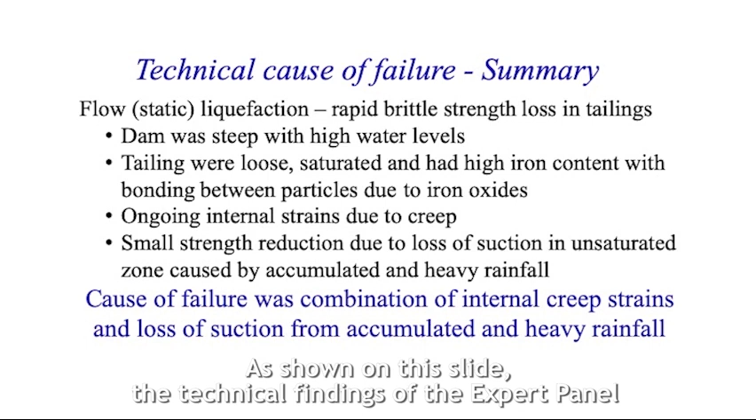As shown on this slide, the technical findings of the expert panel can be summarized as follows. The dam failed when the tailings experienced a sudden and rapid strength loss known as flow or static liquefaction.

The dam was essentially too steep and too wet, and the material in the dam was loose, saturated, and very heavy and brittle.

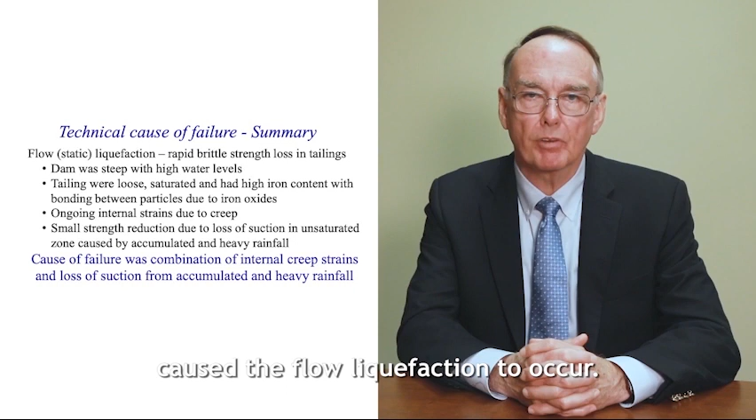The failure of the dam was due to internal creep strains that, when combined with a small reduction in strength in areas of the dam due to infiltration from accumulated heavy rainfall, caused the flow liquefaction to occur. Now let me explain what all that means.

Our assessment of the technical causes should start with an understanding of what this dam was. Most people think of dams as earthen or concrete structures designed to retain water in reservoirs.

In water retention dams, the structure must not allow water to pass through. It must be watertight, or as we say, impermeable to retain the water. That's not the kind of dam we're talking about here.

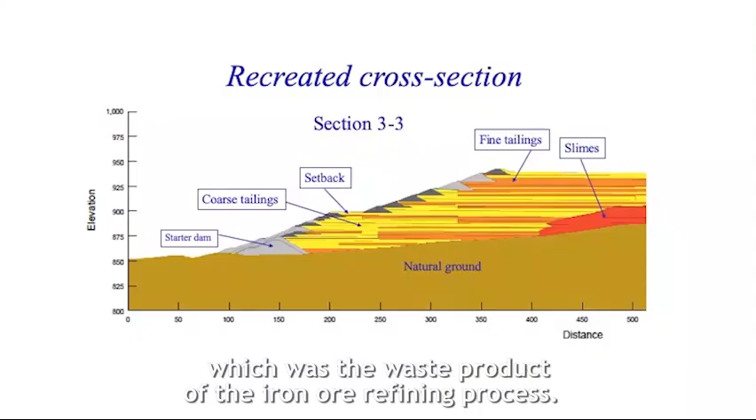This was a tailings dam. It was designed to create a retention area to store mine tailings, which was the waste product of the iron ore refining process. In fact, most of the dam itself was made of tailings.

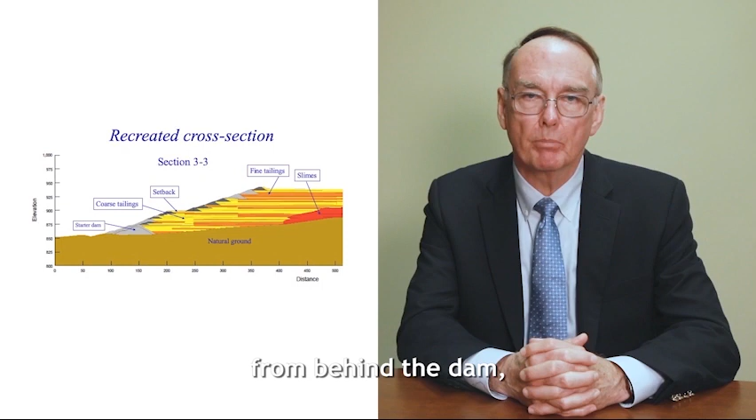A tailings dam like this one should be designed and constructed to be sufficiently permeable to allow drainage of water out from behind the dam, particularly because the stored tailings contain a lot of water that must be allowed to drain.

Or in other words, allowed to slowly flow or migrate out from behind the dam.

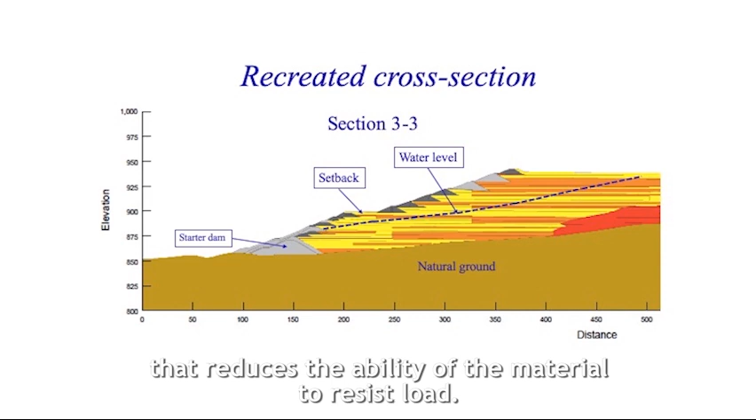This slide shows a cross-section of the dam showing the high water level in the dam. The absence of proper drainage creates a higher water level in the dam that reduces the ability of the material to resist load. This can undermine the stability of the dam.

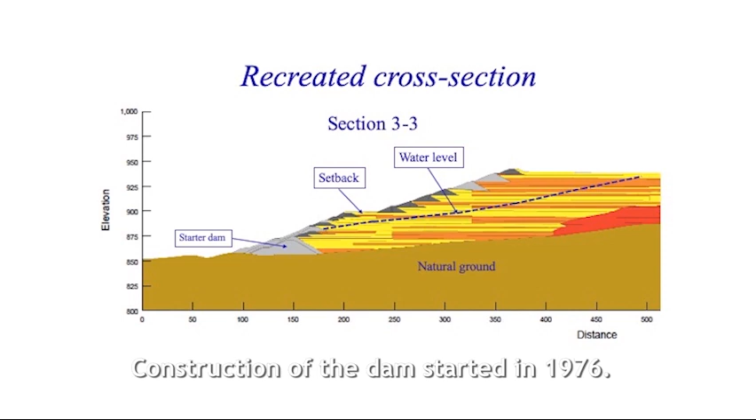In short, water is the enemy in a tailings dam like this. Construction of the dam started in 1976.

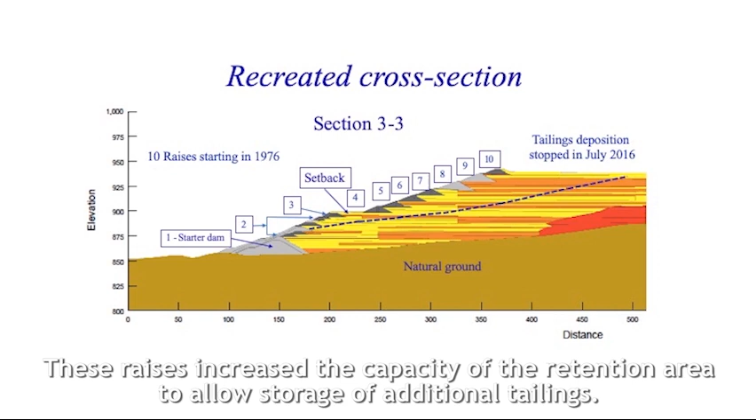It was subsequently heightened, or raised, several times by adding new layers on top of old ones. These raises increased the capacity of the retention area to allow storage of additional tailings. The 10th raise in 2013 was the last.

Each raising used the upstream method of construction. That means that each raising was moved upstream, or back from the starter dam, which was the original layer constructed in 1976.

As a result, each successive dam raise was constructed over tailings that had been previously deposited behind the dam.

The original design and construction of this dam by Ferteco, a mining company acquired by Vale in 2001, did not allow for proper drainage.

The starter dam itself was constructed to be essentially impermeable. It retained water instead of allowing it to drain.

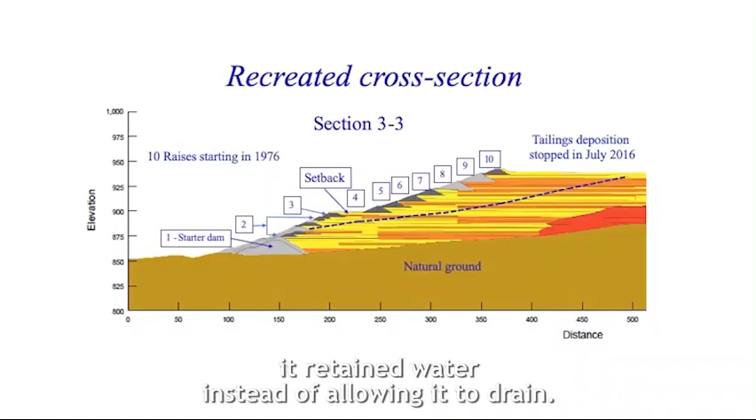As the slide shows, the starter dam and the other raises, combined with layers of fine tailings, had low permeability, resulting in the water level being close to the surface at the toe of the dam.

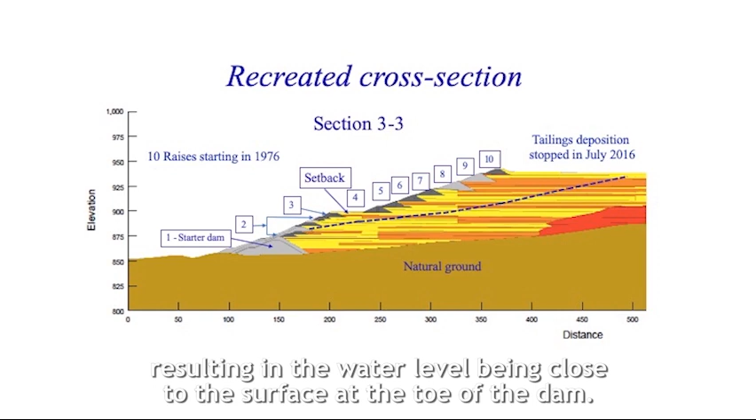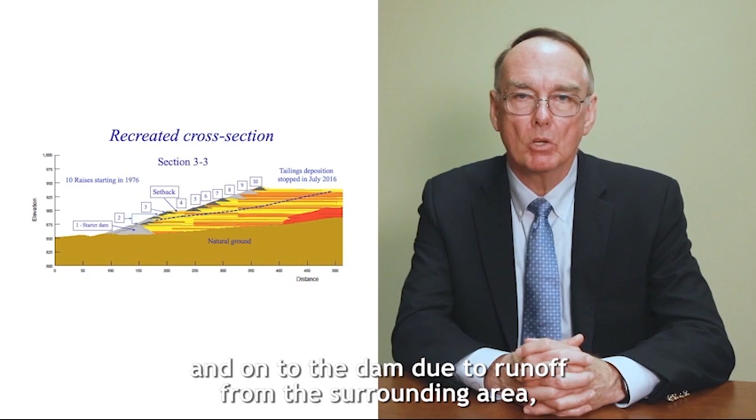Also, the dam was located where a lot of water flowed into the retention area behind the dam, due to runoff from the surrounding area, underground springs, and seasonal heavy rains.

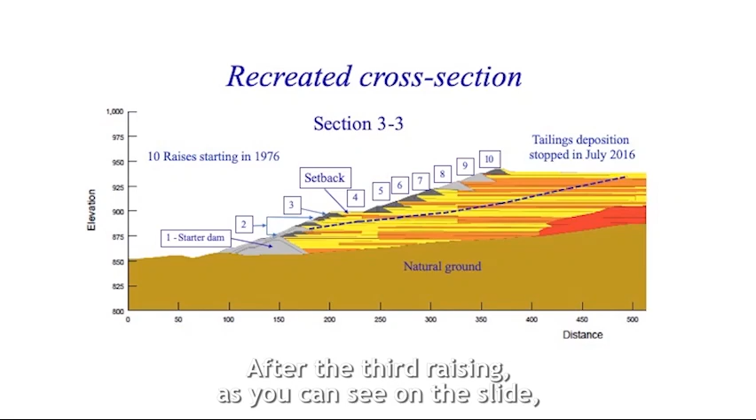Another flaw in the dam's original design was that its slope was very steep. When a dam has a steep slope, greater stress is placed on the material in the dam than if the slope was less steep. After the third raising, a setback was constructed to reduce the overall slope of the dam, but the slope remained quite steep.

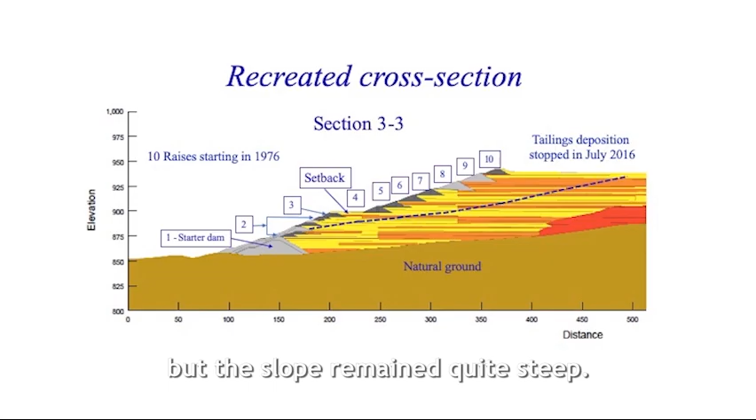Hence, maintaining the stability of the dam was a continuing challenge over the life of the dam because its original design and construction was not robust. Essentially, it was too wet and too steep.

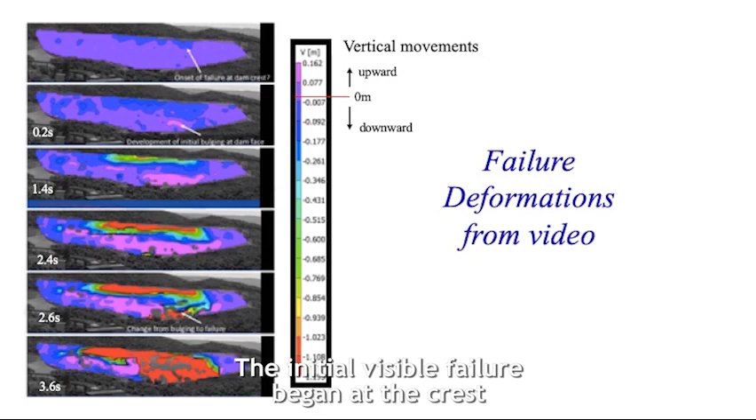The failure of this tailings dam was unusual because it was captured on high-quality video. This slide, from the image analysis of the video, shows the location of the earliest visible movements of the failure. The initial visible failure began at the crest and continued down to an area above the starter dam.

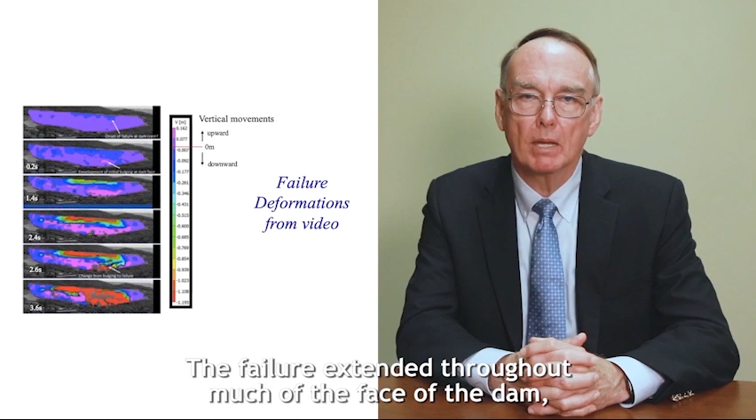The failure extended throughout much of the face of the dam and was over in 10 seconds. Nearly 10 million cubic meters of tailings were released in less than 5 minutes.

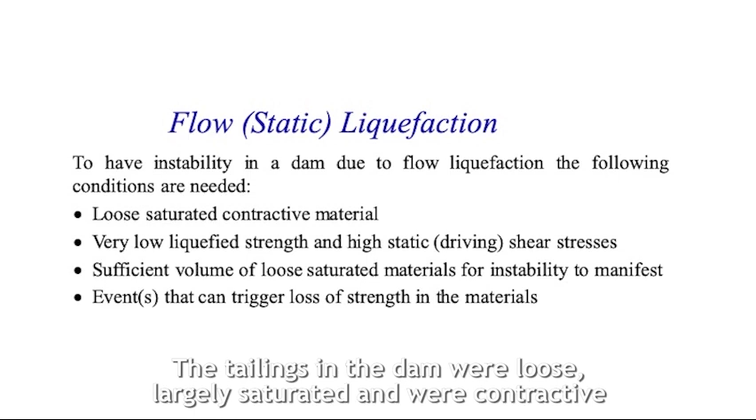The tailings in the dam were loose, largely saturated, and contractive. That is, they had a tendency to compress or contract when subjected to high shear stresses in the downstream slope of the dam. The dam also had high internal shear stresses because it was too wet and too steep.

However, no tailings had been deposited in the dam for over 2 years, and efforts to reduce the water level were succeeding, albeit slowly. In the months before the collapse, the dam was not showing any signs of distress or approaching failure. There was no cracking, horizontal deformations, or excessive seepage, even in the days immediately preceding the failure.

The challenge for the panel was to determine what caused the sudden strength loss that resulted in flow liquefaction occurring when it did. In other words, what was the trigger that caused the dam to fail?

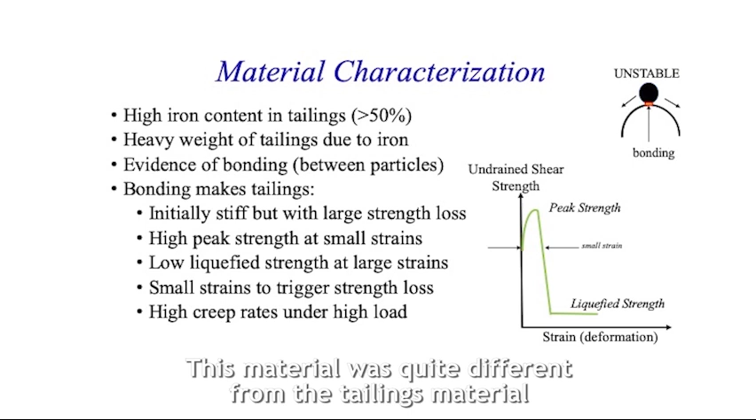We were surprised to determine that the tailings in the dam had a very high iron content, more than 50%, and a very low quartz content. This material was quite different from the tailings material of many other tailings dams that had been studied. It also was very different from the natural soils that exist in the many case histories used to guide most designs.

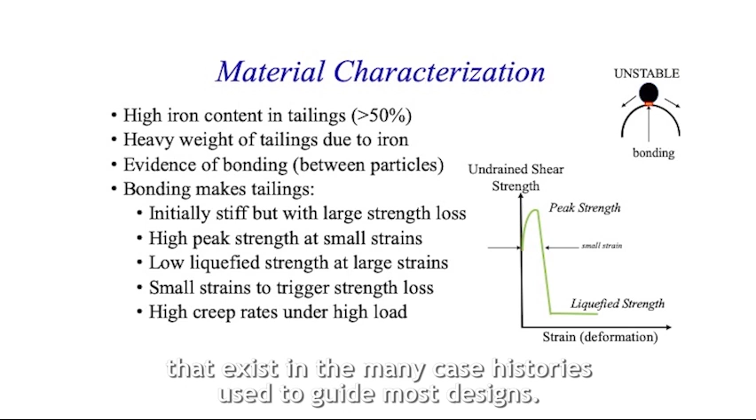We were also surprised to find evidence of bonding between the tailings particles because of iron oxide. Material of this sort is extremely brittle.

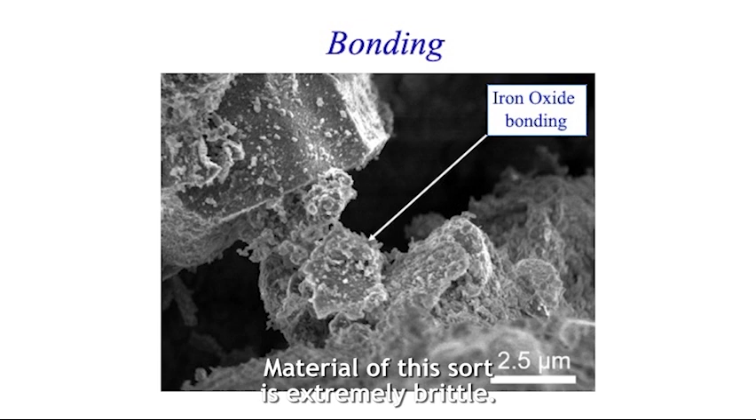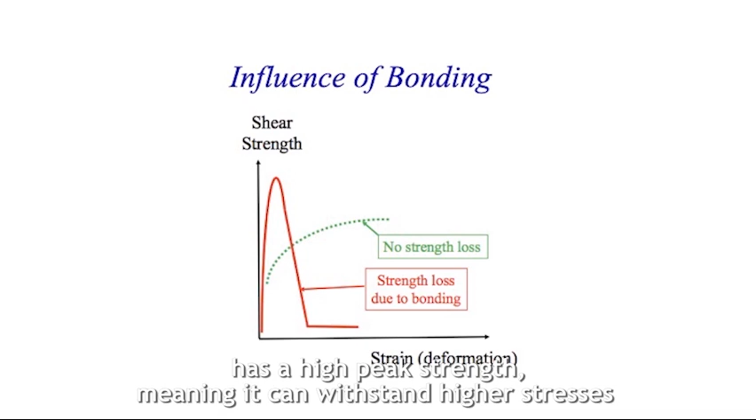As this slide illustrates, material bonded in this way has a high peak strength, meaning it can withstand higher stresses than would normally be expected for tailings that have little or no strength loss.

But when material that is bonded in this manner is subjected to forces or stresses over time, it can at some point suddenly lose most of its strength under undrained conditions. The slide also illustrates that the amount of deformation or strain required to trigger strength loss in bonded material can be very small.

Importantly, materials of the sort found in this dam can experience high internal creep rates when subjected to shear stresses like those that were present in this dam, being too steep and too wet. Internal creep is a constant but slow process.

When a material is susceptible to internal creep, like the material here, it is initially stiff and strong, but vulnerable to very slow deformation. As creep proceeds, the resulting strain can cause such material to reach a breaking point at which it would become incredibly weak very quickly. This is known as creep rupture.

It is like when the metal of a bridge rusts over time. The otherwise strong metal eventually becomes brittle, and when it does, it easily breaks and falls away. The last car to drive over such a bridge did not cause the bridge to fail. It was the metal rusting that slowly, constantly caused the bridge to lose its strength.

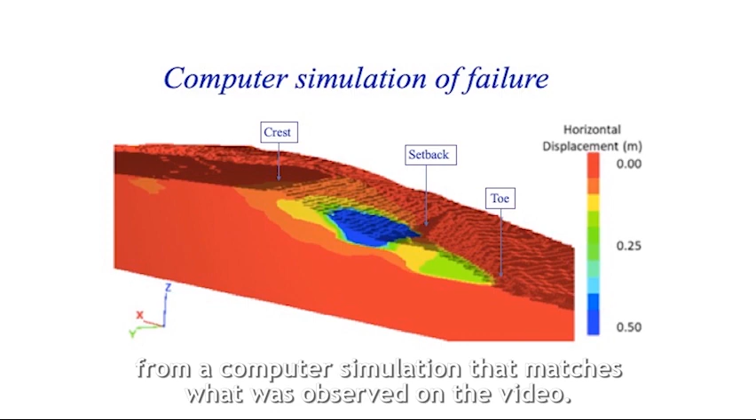This slide shows the failure surface from a computer simulation that matches what was observed on the video.

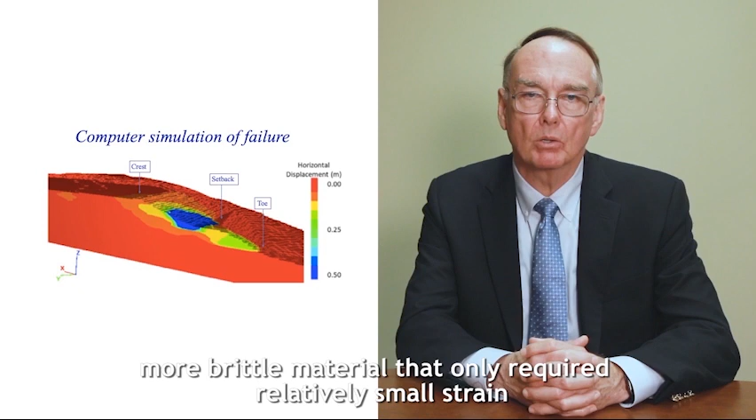To summarize, the bonding of the tailings because of iron oxide created a stiffer, more brittle material that only required a relatively small strain to trigger strength loss and failure. The stresses in the dam caused by the dam being too wet and too steep were sufficient to cause ongoing creep strains.

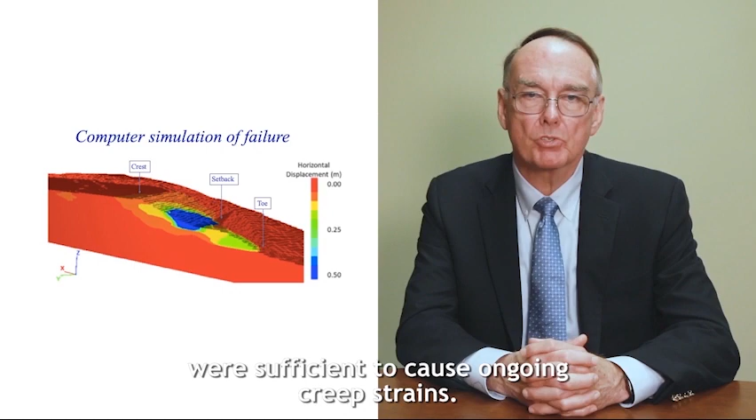The evidence shows that the failure on January 25, 2019 was caused by a combination of ongoing creep strains and a small strength reduction due to loss of suction from accumulated heavy rainfall, including the intense rainfall toward the end of 2018. This was confirmed by advanced laboratory testing and computer simulations.

These findings are not something that we've seen before in connection with other tailings dam failures. The panel report and its appendices detail these findings. As the panel report also details, all other potential triggers were ruled out based on the available evidence.

However, I would like to discuss briefly 3 events mentioned as possible triggers or causes. First, blasting in the open pit mine at the site has been raised as a possible trigger of the failure.

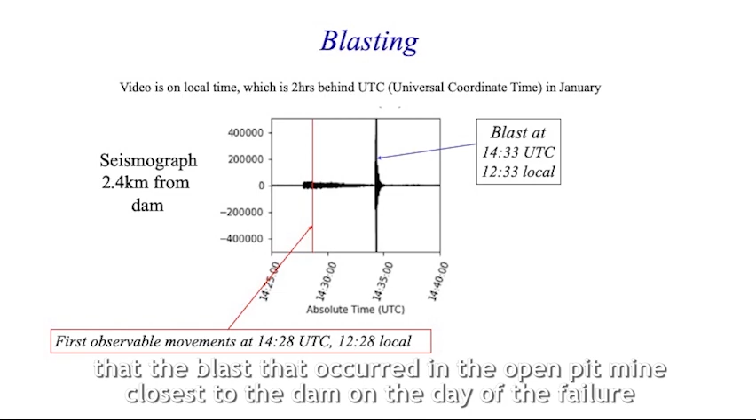However, as shown in this slide, we determined from an analysis of seismograph data that the blast that occurred in the open pit mine closest to the dam on the day of the failure did not occur until after the dam had failed. Therefore, blasting was not the trigger that caused the dam to fail that day.

Second, on the day of the collapse, drilling of a vertical borehole was underway on the dam. That drilling was part of a project in progress for several months to test soil and to install more monitoring devices. These boreholes were very small, only 4.5 inches or 114 millimeters in diameter.

Significantly, on the day of the failure, the borehole drilling on the dam had extended below the tailings and had reached the natural foundation soil. Computer simulations have confirmed that the drilling of that borehole did not cause the failure. The borehole drilling would have had only a small, localized impact on the dam. Therefore, it was not the trigger.

Third, beginning in early 2018, deep horizontal drains, or DHPs, were installed in the dam in an effort to reduce the water levels. When DHP number 15 was being installed in June 2018, it caused a flow of water and fine materials, that is, turbid, muddy water, to seep out of the dam for several days.

This incident did not cause the dam to fail at the time, and computer simulations show that it did not cause the dam to fail 7 months later.